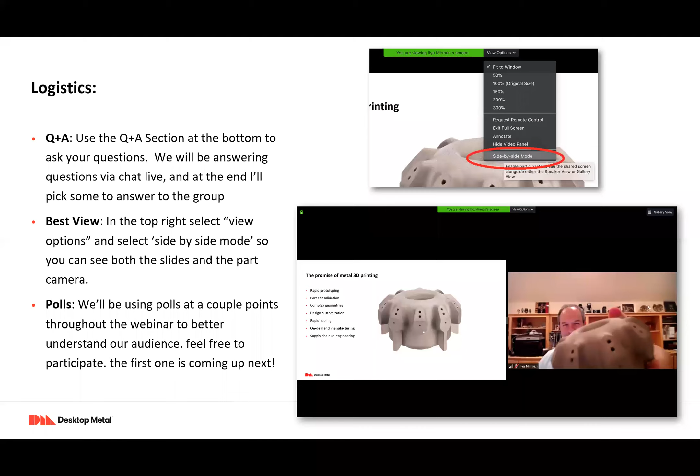3D printing addresses those challenges, and then talk a little bit about the technology choices we've made in our metal 3D printing systems. Then we'll do sort of a broad swath across dozens of application examples from the manufacturing floor, and then do a deep dive on a handful of case studies right from the manufacturing floor.

So let's get moving. So what are the manufacturing floor challenges? So first, if you think about as a product is being developed, as it moves from product development to manufacturing, there will be a need, of course, to set up a production line. And sometimes it could be assembly of components that are either off the shelf or custom that are being delivered. And other times it's the manufacturing, it's the fabrication, it's the stamping, tooling, molding.

So there is an effort involved in the time, the cost to set up a new production line. And it might be modest for some products. For other products, automobiles, for example, it's literally billions to stand up a new production line. And so one challenge is just the time it takes and the effort and the non-recurring engineering charge to create and move to manufacturing a new product.

Second, related challenge is the lead time and cost specifically of new tooling. It could be stamping, injection molding, extrusion dies. Third challenge is the maintenance, repair, and operation, sort of replacement parts for the manufacturing floor. Parts wear out, they need to be replaced. Next is a lot of those parts, or at least some of the tooling in particular, those are hard-to-machine materials. And so machining them in the shop is not an easy thing.

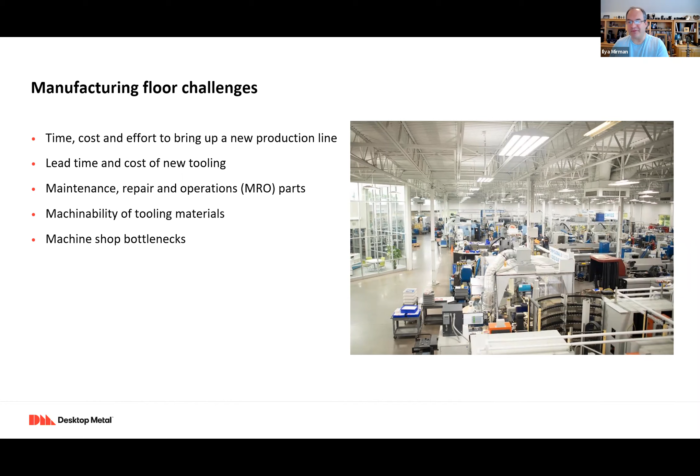So 3D printing for the manufacturing floor, and the reason I say for is because this is around the tooling, jigs, and fixtures, as opposed to what gets 3D printed on the manufacturing floor and used parts. That's the next slide. So with 3D printing you can have the notion of nearly real-time tooling. You need a part and you can have it in a short number of days, as opposed to the lead times of either ordering it and waiting for a custom tool to be made, EDM, or even just CNC, but that could be a complex operation.

The geometric complexity of the tools is free. We'll see these in more detail, but here are some examples. This is end-of-arm tooling, and you see it's lightweighted to reduce wear and tear on the robotic arm. There's relatively complex tooling available. So the geometric complexity is free. If you can imagine the 3D shape, you can probably print it. You can offload, of course, a lot of the work; you're now printing it instead of machining it, so machinist labor is not involved.

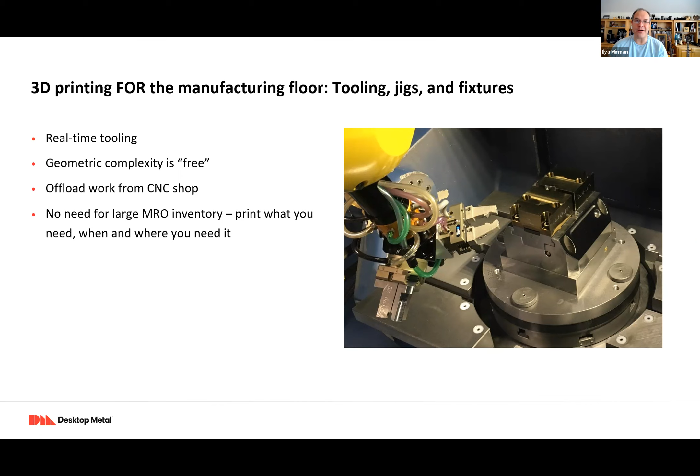And if you think about a manufacturing floor, you have replacement parts. You can't have a production line go down. And so you often have a stock room with maybe 3 or 5 replacement parts times 100 or times 1,000 different parts. So instead of keeping that inventory, you could just print what you need when and where you need it. So that's the promise of 3D printing, and that is how both plastic and metal 3D printing is being used.

So that's printing for the manufacturing floor. And then there's, of course, 3D printing on the manufacturing floor, and the value proposition is mass production without tooling costs, without tooling delays, without the constraints of tooling. And so you can now print a broad, infinite range of geometries and parts. We'll take a look at some of these, but you see you can do quite intricate parts, really on demand.

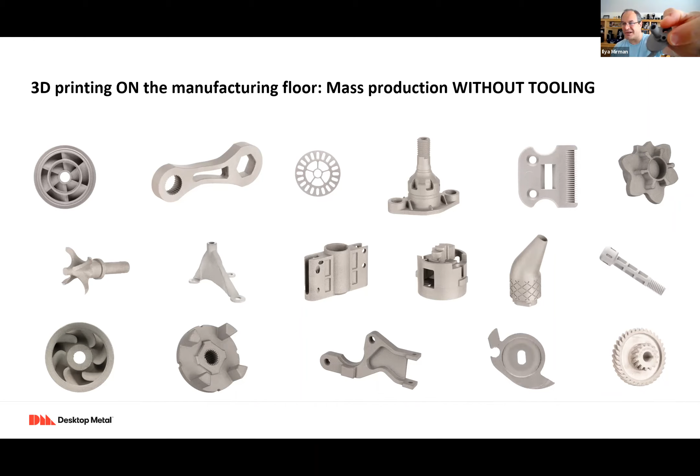Here's a part that might otherwise be cast, but there's effort and non-recurring engineering charges associated with casting them. With 3D printing, you can just manufacture them. So both of these, the tooling, jigs, fixtures, as well as mass production, are relevant for the manufacturing floor. And now technologies are available to actually deliver on this promise. So let's take a look.

And we have 4 main product lines. We have a composite fiber printer, and the innovation there is you can print continuous fiber reinforced composites. And then we have 3 metal systems: an office-friendly studio system, a shop system for mid-volume production, and a production system if you need to make tens of metric tons of parts per year. I will mostly focus today on the studio system examples for the manufacturing floor, although I will touch on how the mass production printers are relevant as well.

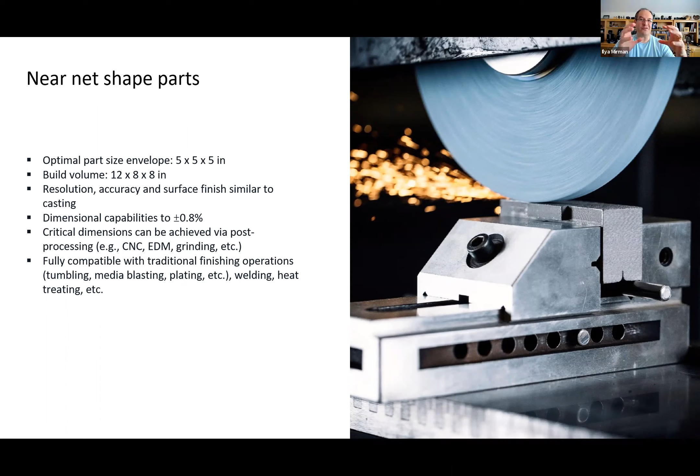The ideal part size, the sweet spot, is parts that fit in the palm of your hand. And so that might be a 5-inch cube or softball-like sizes. The build volume is more like a loaf of bread, 12 by 8 by 8, so you can print a bunch of parts. We can make larger parts, but that's kind of the sweet spot. And of course, afterwards, you can do everything you do to metal parts, whether it's welding, heat treatment, etc.

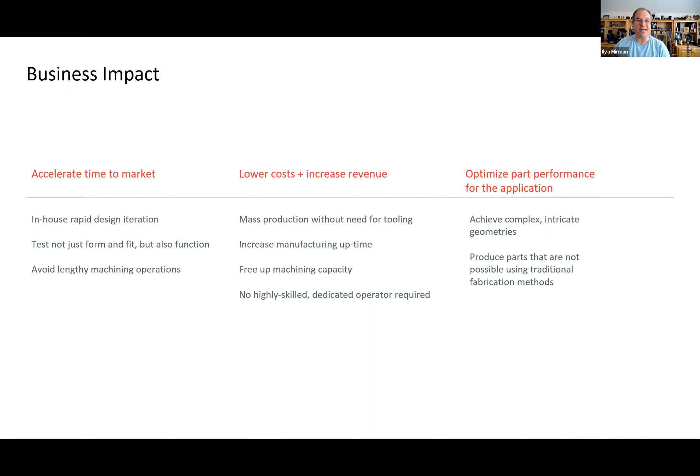The big business impact, the big benefit, there's 3. There is optimizing the part performance, so you can make better parts. With 3D printing, you can consolidate assemblies. By creating shapes that you can't with other manufacturing processes, you have a whole new design freedom, and that can result in better parts. So that's one benefit. The other is rapid prototyping. You get parts to market faster. What I'll focus on today, though, is what is the win for manufacturing?

In manufacturing, there's 2 giant opportunities. One is you can finally do mass production without the need for tooling. So that means you don't need to make molds, you don't need to make stamping dies. You can create a range of parts. You can have both mass production and mass customization. Imagine every part in a build. You're printing 16 liters or 50 liters worth of metal parts every few hours, and every part is a little bit different or a lot different. You start with a digital file, so as easily as you can change the digital file, you can print what you need. So the first win is mass production of parts without tooling.

The second is being able to print all of the things you need on the manufacturing floor. So that's jigs, fixtures, things that hold, as well as things that deform parts: metal extrusion dies, sheet metal stamping, and mold inserts. We'll see examples of all of that. So let's talk a little bit about rapid tooling for the manufacturing floor. I'll show a few examples, but you can do things like a drill alignment jig. There's a variety of end effectors we'll take a look at. Just a bunch of parts.

These are from diverse areas. The smartphone fixture is obviously from a consumer electronics product. There it needs to be metal because maybe rework is happening. It's a high temperature operation. With drill alignment, there might be forces involved. You'll see examples with the robotic end effectors, a lot of forces involved. What they all share, though, is they're relatively complex parts that are not trivial to machine, and you need just a few of them. For that reason, you're not going to set up a whole mass production line to produce these manufacturing aids.

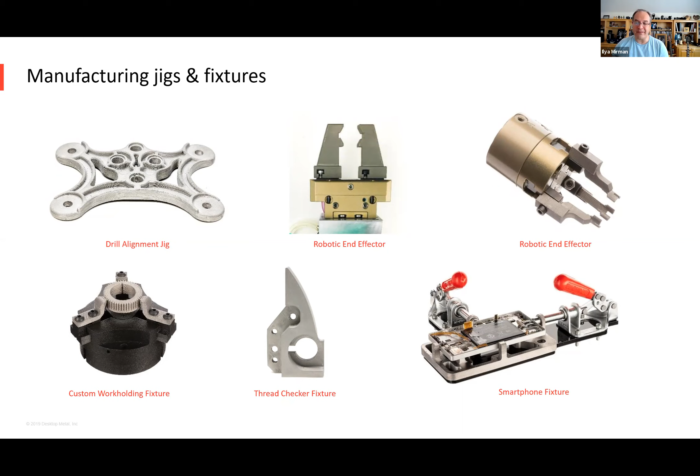And so 3D printing is a great way, because the alternative is machining, and machining can be expensive. You might have capacity bottlenecks. It involves quite a lot of labor. So the next stage, tooling. The whole point of tooling is these are hard metals, and so machining hard tooling is actually quite tricky. You can go through a lot of carbide tools. So it's a big win, for example.

So you see this first example of a mold insert with a conformal cooling channel. So this is the part that's actually getting molded. We printed this part just halfway, so you see there's an internal cooling channel. The big win there is you can dramatically decrease the cycle time. The cooling time decreases, and so you can dramatically increase the frequency with which you're molding these parts.

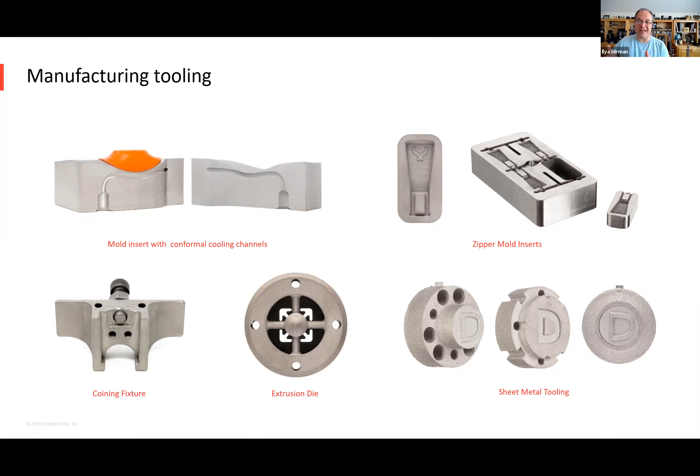And so tooling, being able to print tooling on demand, in fact, you can be printing tooling while the product is being developed. It's really parallel with the product being developed. You don't need a lot of lead time. And so by the time the product's ready to be manufactured, you got your tooling ready. And you can turn to a growing library of metal materials.

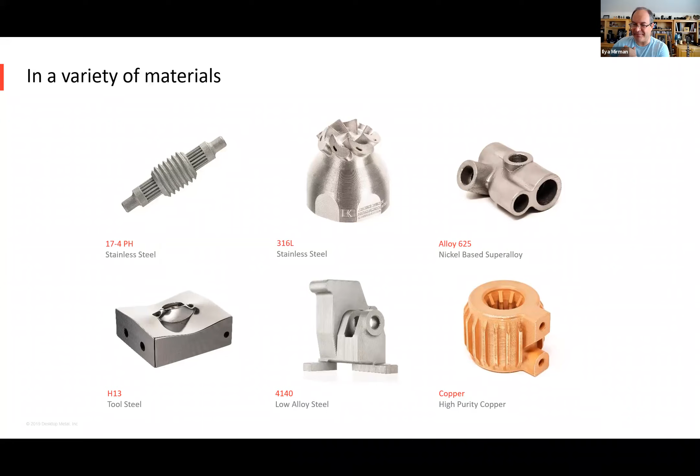All right, manufacturing tooling, jigs, and fixtures. So another whole category is things that hold. So let's take a look. Let's do a rapid walk around the world. So this is a part that places an O-ring around another part during the manufacturing process. This is the end of the robotic arm, and so it stretches, puts the O-ring on, and compresses.

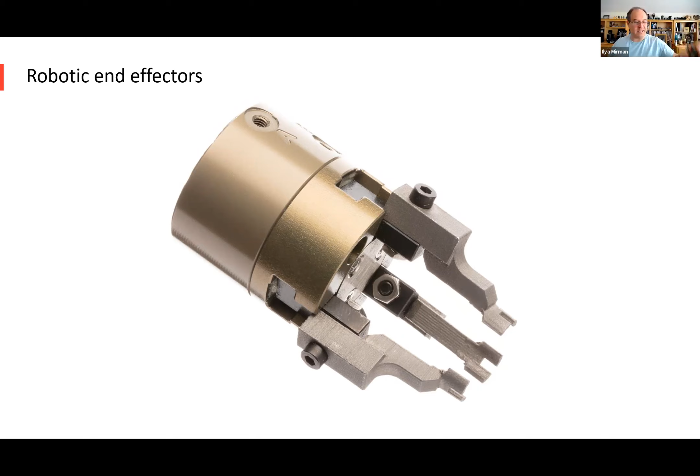And so, I think you can see, these are relatively fine end effectors. And so being able to machine them, you can imagine you have a ball end mill or whatever cutting tool. These are probably a millimeter, less than a millimeter in thickness. These would deform during machining. And so it's a pretty extensive machining process, pretty laborious, pretty small stuff, and it's quite tricky. Now you can 3D print a whole bunch of them at a time, and have them ready when you need them.

Let's see. Here's another example: end of arm tooling. So we'll see more when we get to this particular case. End of arm tooling, of course, refers not to the fact that it's being held at the end of his arm, but it's the end of the robotic arm. And so this is an example of end of arm tooling. It picks up a heavy, hot metal part being forged, I believe.

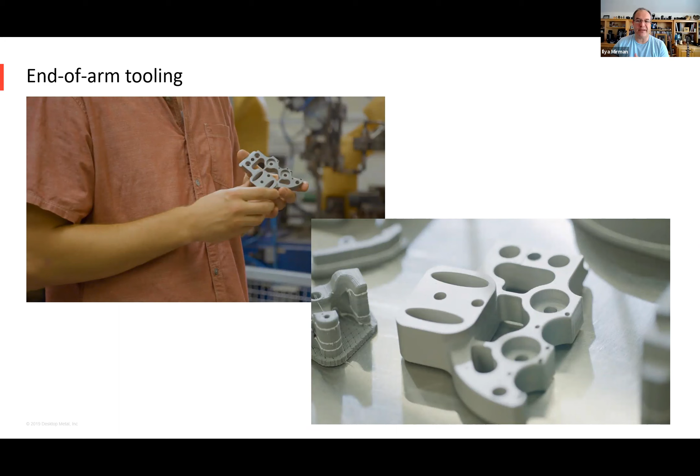And the big win with end of arm tooling is lightweighting it. The less it weighs, the faster the robotic arm can move around, the less inertial loads there are. So you can have a faster and more reliable process; there's less wear and tear on the robots. You can do, of course, complex shapes. This is a drill alignment jig. We talked a little bit about the smartphone fixture.

Let's spend a second on mold and tooling. So one of the materials available is H13 tool steel. So this is great for both hot and cold work applications. In another second, I'll show you it actually in action in at least one place. But you see, here's the familiar stress strain curve. Well behaved. There's the as-sintered. As-sintered, the parts come out from the furnace fully annealed with no memory of the shaping process.

And in fact, if you cut and section them, you literally cannot tell X, Y, and Z axes. The grains, the crystal structure looks identical. You get 96 to 99% dense parts, and the voids are typically 5-micron voids, evenly distributed. So it's well behaved, not unlike a very fine casting. So tool steels, and you can of course heat treat.

You can heat treat all of the materials. Even the 17-4 PH steel becomes much harder. 17-4 PH steel comes out from the furnace annealed at 25 to 30 Rockwell C, and through the heat treatment you can get it to 45, and through plasma nitriding, a case hardening process, you can get it to 65. So a broad array of heat treatment processes are available.

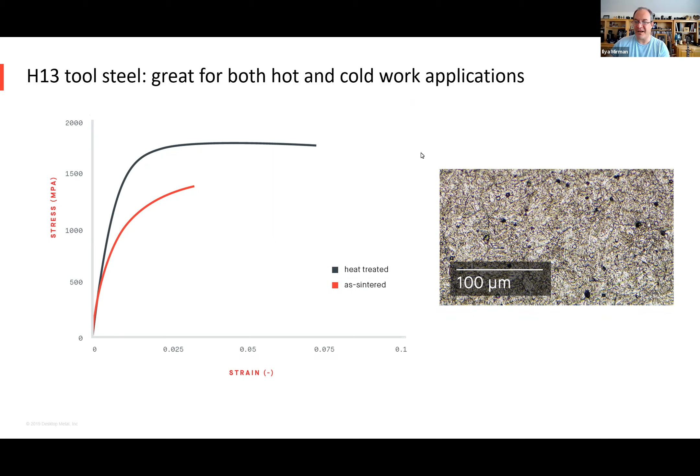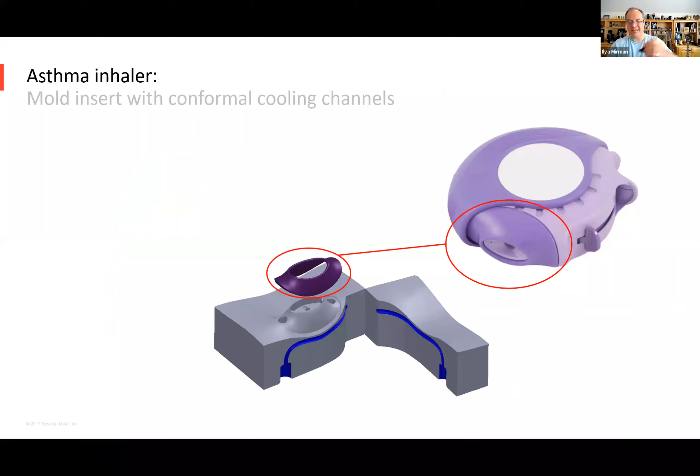All right. So let's take a look at some examples. So there's the asthma inhaler for the mold. Here's the actual part getting molded. It's an insert. You can make cooling channels. And so the big win here is twofold. First, you print a part that's near net shape.

You may still need a couple passes to get the exact surface finish and dimensions you need, but by getting the tool steel to near the net shape you need, you don't need to start with a large block of steel and go through a lot of wear and tear on your carbide tools to machine them.

The second one, of course, is the ability to create a geometry that you can't produce any other way, which is an internal cooling channel. And so here's an example of that. Basically, the closer you can get the cooling channel to the part, the faster you can cool the part down and decrease the cycle time. And typically that can increase things 25, 40%, which is a big deal for relatively low margin kind of operations.

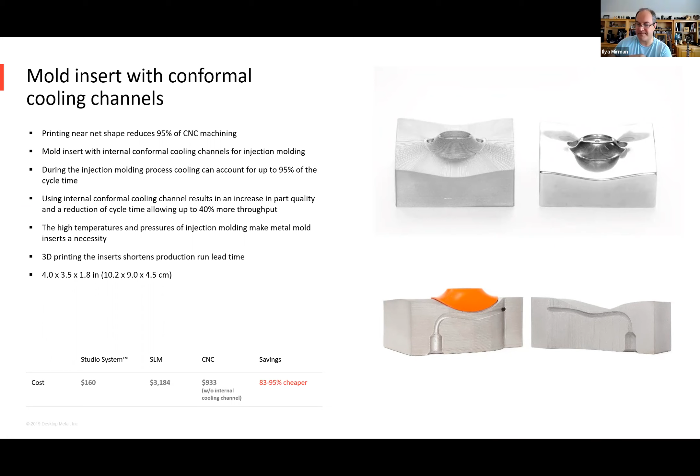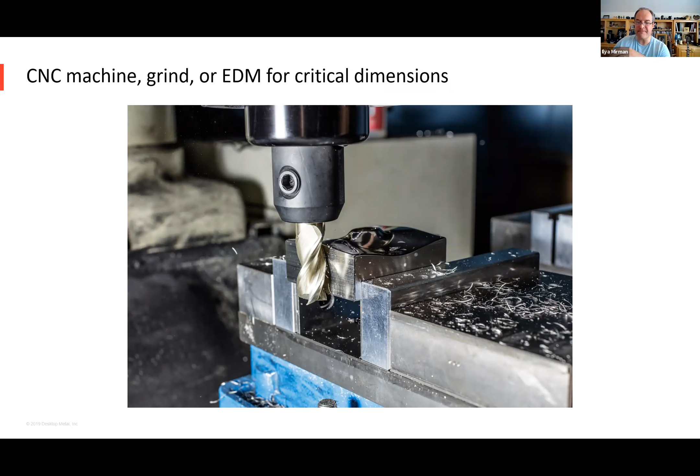And then, of course, here's that mold insert getting, for the critical dimensions, you can machine them. So here it's getting machined to fit perfectly in the mold cavity, and then here's another mold insert getting EDM finished.

And do zipper molds. I think I have an example of that. Where is it? Here it is. See, there's so many metal parts around. So here the idea is, first of all, a little background. What is this? So it turns out, news to me, but zippers are a fashion element.

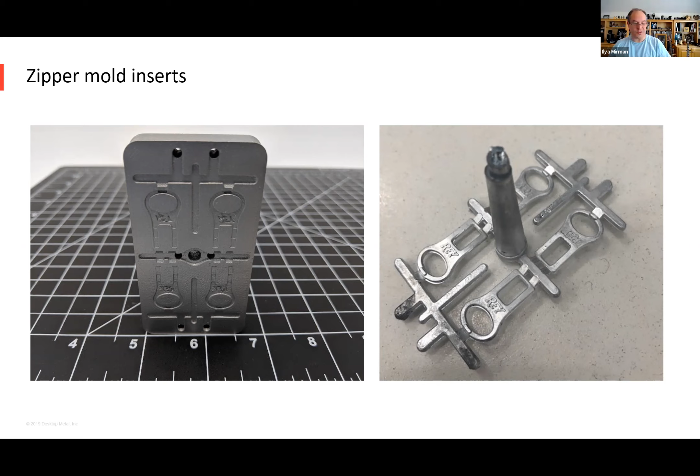And so now imagine you need to produce maybe a run of custom zippers, you just need 500 of a particular zipper for a luxury bag or something, or a piece of clothing. Instead of printing or machining whole molds, you can have just inserts. And so print an insert, and you can do that with the fine resolution printhead from the Studio System and use it right in the mold. And so now you can do relatively small, precise features that might not even need post-processing of the mold insert.

Do extrusion dies. Here's an example. So this is a twin screw extruder that's mixing and pushing a dense ceramic slurry through this extruder. I'm going to take this off. So here's the interface, and here is the part in question. You see there's a gasket on this end. So you basically start with a circular profile, and you end with a rectangle.

And it's rectangle because the final part, it's like you're extruding pasta, except you're extruding ceramic mixture. The goal here is to create a rectangular shape. You need to start from circle because that's the standard interface to the extruder. It's an easy part to model. This is a loft. If you have a parametric feature-based solid modeler, you start from the circle, you draw the profile, you wind up with a rectangle. But it is not an easy part to actually reduce to practice, to create.

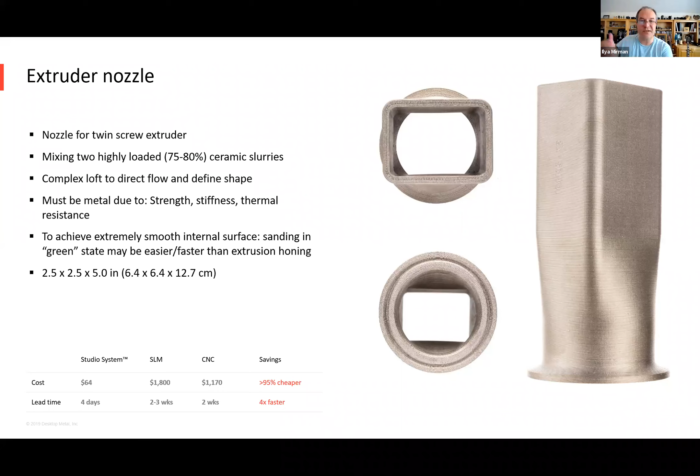You need a 5-axis machine, and our customer looked at a number of bids, and it would be $2,000-$3,000 to make this shape. You could see this is probably 6 inches or so, maybe 7. So with the Studio System, it's an order of magnitude less. It's $60 or $80, and you have the part. You can make complex extrusion dies that are either difficult or impossible to create. So this one you might EDM this shape.

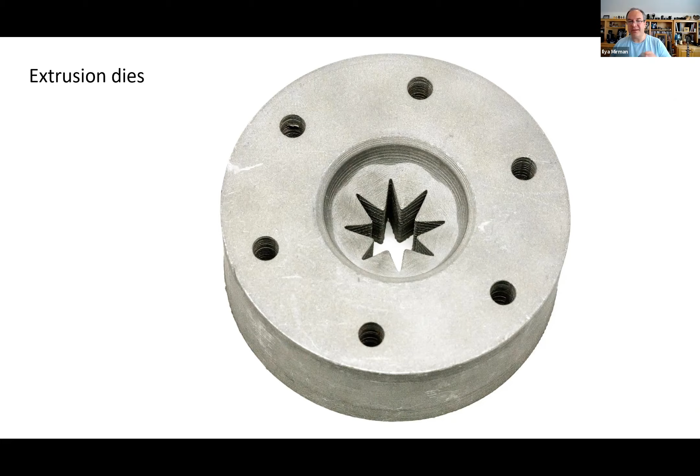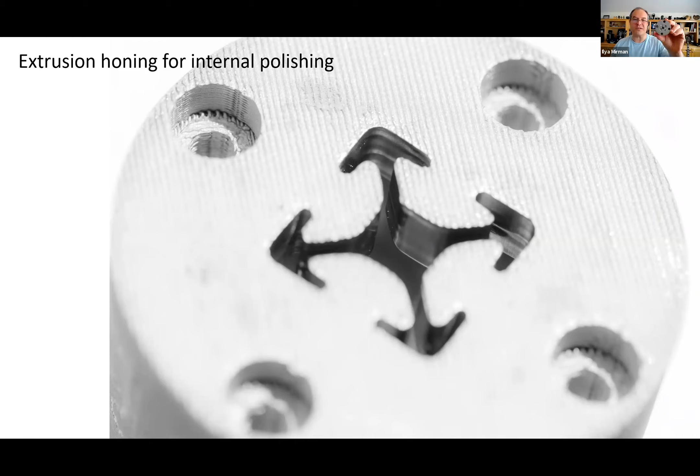Here's an extrusion die with a familiar 80-20 profile. In this photo, you might see that this surface is particularly reflective. You can do, of course, extrusion honing so that whether it's aluminum or zinc that flows through here or plastic, it flows easier. So the same things you might do to dies, you can do to these dies.

Sheet metal tooling. Of course, 3D printing is not a win in every single application. So you got to look at what is a sufficiently complex part, what is hard to machine, or where do I not have the lead time to wait. And so for some parts, even sheet metal tooling makes sense to print.

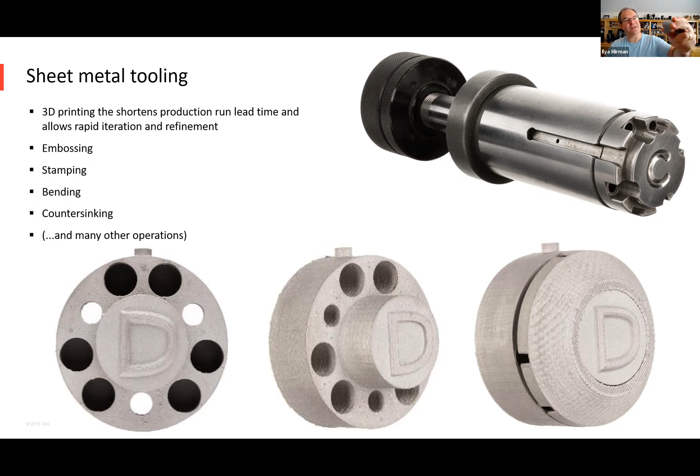So you can do embossing tools. We've seen stamping, bending, countersinking tools. Here's a couple of these parts. So this is part of, I believe this is embossing, for logos on a piece of flat sheet metal forming.

You basically go from art to part. Here it is in SolidWorks, and there it is, those very parts printed a couple days later. So sheet metal tooling, bending, I have examples somewhere here, but you get it.

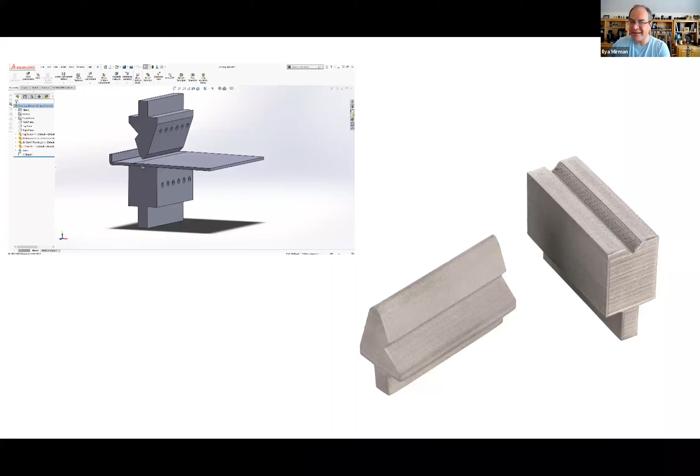Here's a fun little example, a blacksmith touch mark. So H13 tool steel. Here are the inserts printed with a custom stamp of this blacksmith. And you know what? I'm going to turn down the audio. Whoops, that's not it. I'm going to play this. So you're going to see, this is a couple thousand degrees Fahrenheit part getting this stamp from the blacksmith using this H13 printed insert.

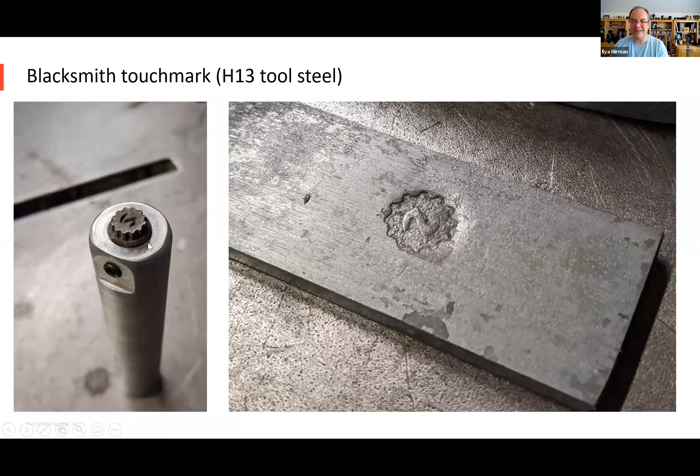So let's see what that looks like. Really, we're showing you the video so you get a sense for, okay, these parts are pretty tough, pretty hard. You can do hot work with them as well as cold work. So now let's take a look at the actual stamp. And there's his little, I don't know if that's an S or a Z. And here is, again, the touch mark. Here's the resulting stamp. Works great.

All right. So now let's take a look at some case studies. So the first example is Alpha Precision Group. Alpha Precision Group is in St. Mary's, Pennsylvania. It's a leading vendor of precision metal components using, for the most part, powdered metal and the metal injection molding approach. They wanted to do two things. One is reduce the tooling costs for their mass production lines, and the second is being able to engage their customers earlier during the design process, and so being able to produce parts in low volume as samples to actually win business.

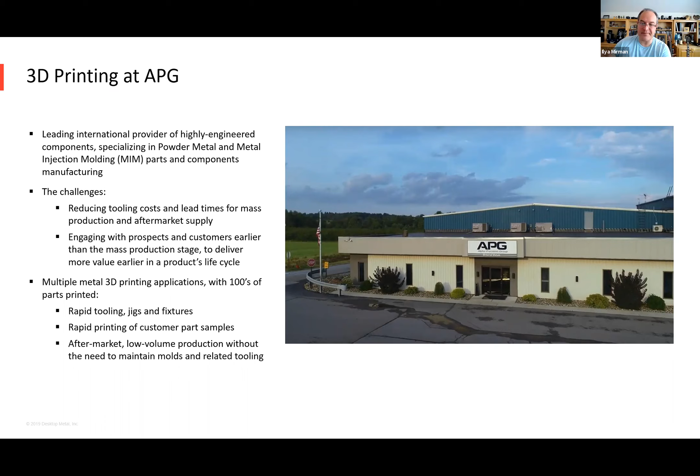So there's a number of examples. They've literally printed hundreds of parts with their Studio System, hundreds of tooling, jigs and fixtures kind of applications. I'll show you just a couple. This is that light-weighted end-of-arm tooling example. It's got to be metal because it's holding a heavy metal hot part, and it manipulates it, and you see there's light weighting going on. This would not be trivial to machine. This is a lot of different setups. Some of the radii are relatively small, so you'd need probably a small ball end mill to hog out a lot of this material. With 3D printing, that geometry is free.

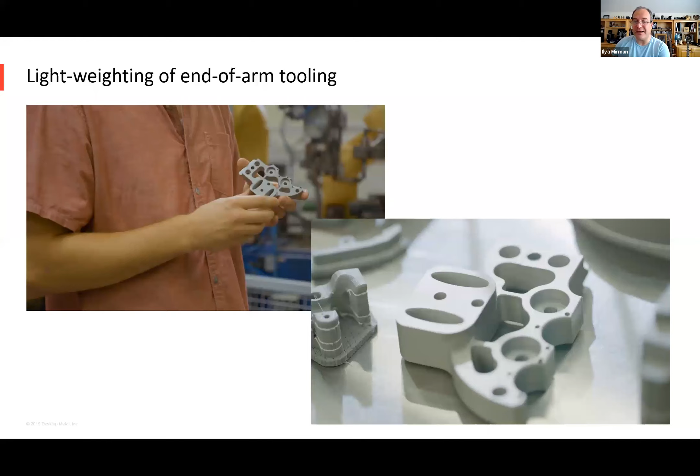Another great example, let's see if I have that. I do. The chuck jaws to hold work pieces together. So this is holding parts during a machining operation. It's a large part. These jaws come together and grab the part. I'm going to hold it up. You see, this is not a trivial part to machine. You could machine it, but this would be a lot of different setups, and it would easily keep a machinist busy all day. Now you can just 3D print this part and throw it on the manufacturing floor.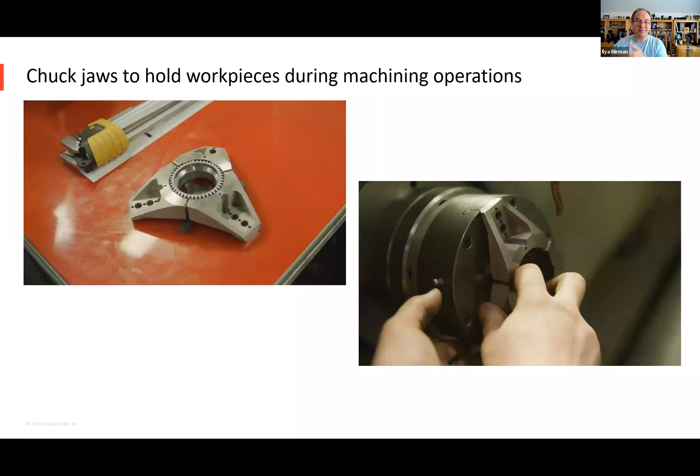Another example, I love this one, and I'll tell you in a minute why. So this is an assembly line screwdriver. This originally was a manual operation where somebody would screw in components on the production line. It's obviously a repetitive task, and you can imagine repetitive use injury, probably also not super fun to just do that all day. And so the manufacturing engineers came up with a pneumatic tool to replace that screwdriver. Instead of a human, now there's this nice ratchet set that works great. It's a pretty complex design. I'm going to try to take this out without having the 20 parts fall apart. So you see, this is a ratchet set, and this is the unit that is at the heart of this device.

Why do I love this example? This is an example of a small company walking around the manufacturing floor, seeing an opportunity and designing something for 3D printing that they would never have somebody machine. Because if somebody was to machine this, it would be a $10,000 job, if at all possible, that they would send outside and probably get back in something like 2 months. Instead, they conceived the idea and within a week had this part. And so this is a dramatic lead time savings, days instead of a couple months, and dramatic cost savings. It's $700 instead of over 10,000.

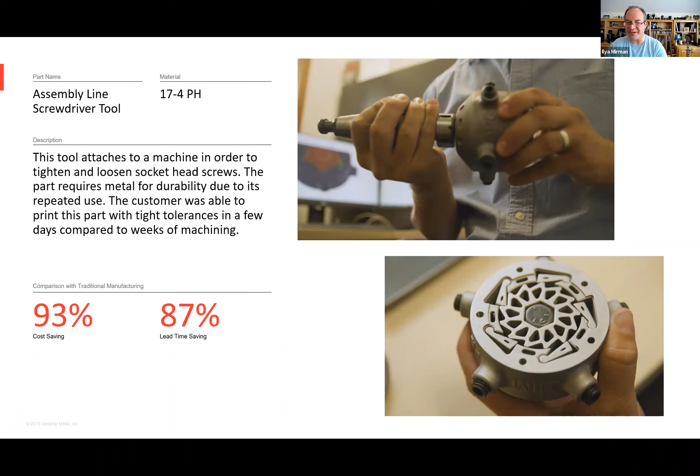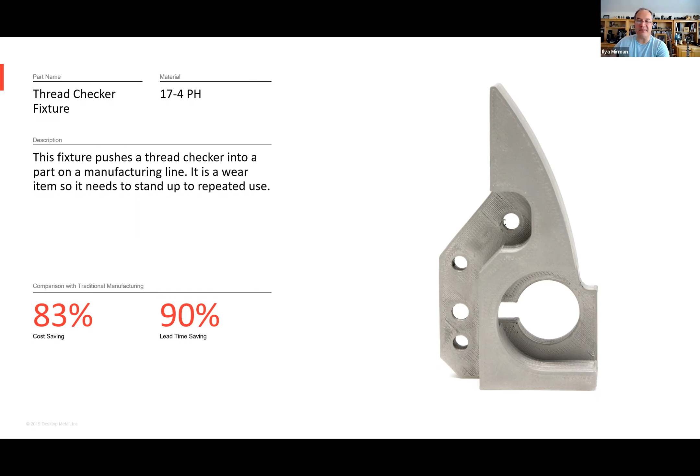There's more examples from their manufacturing floor. We only have limited time here, so I'm not going to show you. There are hundreds of parts, but there's a coining fixture. There's a thread checker. This pushes a part into essentially a way to check whether the thread on a molded part turned out fine. This part wears, and so the ability to print it and easily replace it on demand is an important one. And the big win for Alpha Precision Group is a dramatically compressed time and cost of manufacturing tooling. And they're not just doing things cheaper and faster, they're doing things they wouldn't have otherwise.

And so that is a very, very cool thing for a small manufacturer. The other big win is the elimination of all the labor-intensive manufacturing steps by designing new tooling. And finally, they can produce on-demand parts both during the early stage of their sales cycle as well as aftermarket, so that they don't need to maintain a tool.

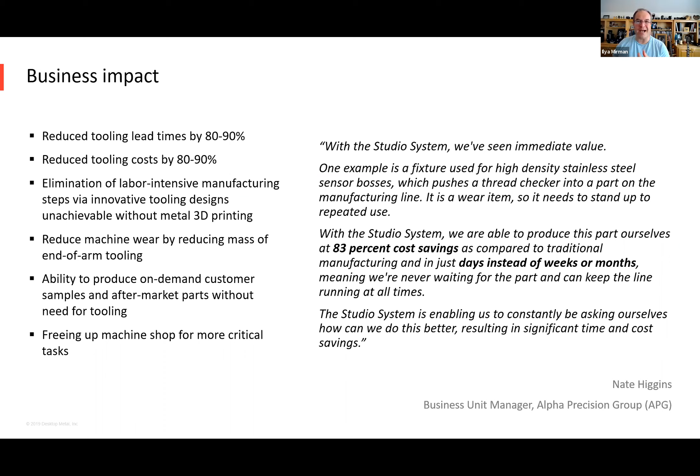Imagine you do a production run of 5,000 parts, then you keep the tooling around because 3 years or 5 years from now, by contract, you're obligated to if there's a requirement for some replacement parts. You might run a tool a day or two to produce 20 or 50 or 100 parts years after your mass production run. But in order to do that, you keep tools around. Instead, you can just print the actual parts on demand. And so that's the other use that APG is doing.

Another example from the manufacturing floor is Egar Tool and Die. It's a 40-year-old company in Ontario, Canada. So they have quite a broad scope for additive manufacturing. They make largely automotive stamping. Their manufacturing line is automotive stamping for automotive parts and welding of some of those parts.

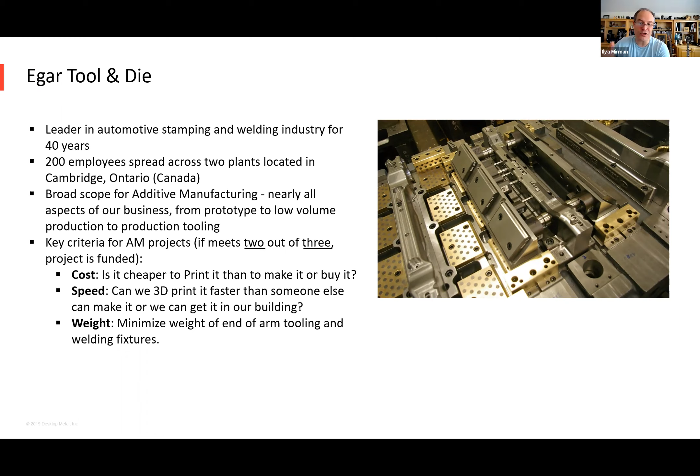The things they 3D print are anything for the manufacturing floor if it meets 2 of 3 requirements. So either the part is cheaper and or it's faster to 3D print, and in particular for the end of arm tooling, they can reduce the weight. So if they can reduce 2 of these 3, they apply 3D printing, and they've seen a lot of benefit to that. I'll show you just a couple examples, because we don't have time for any one of these beyond just a few minutes.

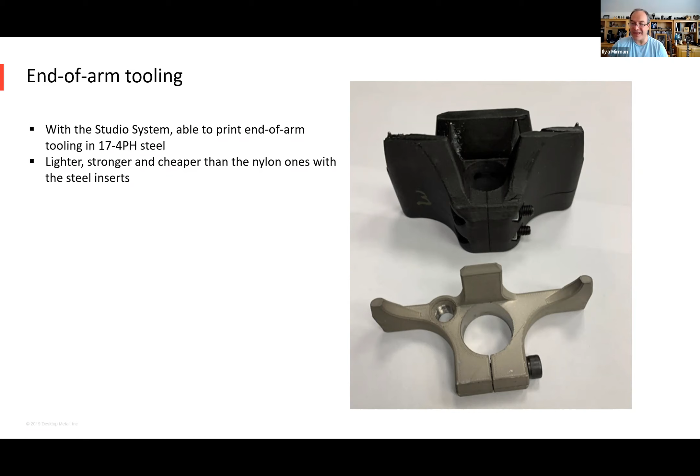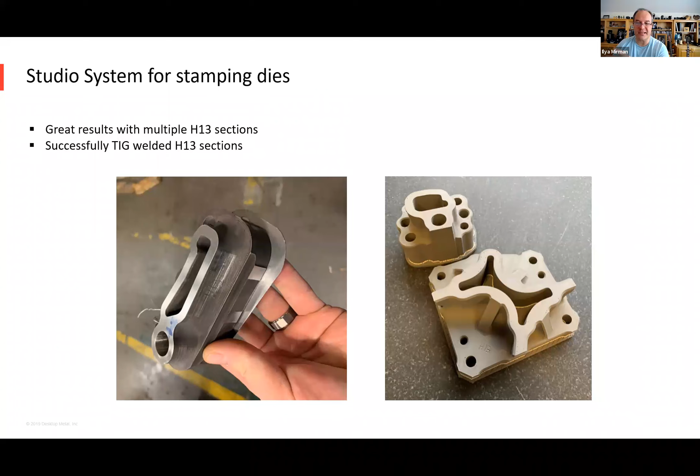So end of arm tooling started out on the manufacturing line with nylon printed parts with steel inserts, and by redesigning them, they're actually single pieces made of steel. They're lighter, stronger, and cheaper. And so that's a win. They've used Studio System for stamping dies with H13 tool steel, and in fact, welding some of the materials together. The parts weld beautifully.

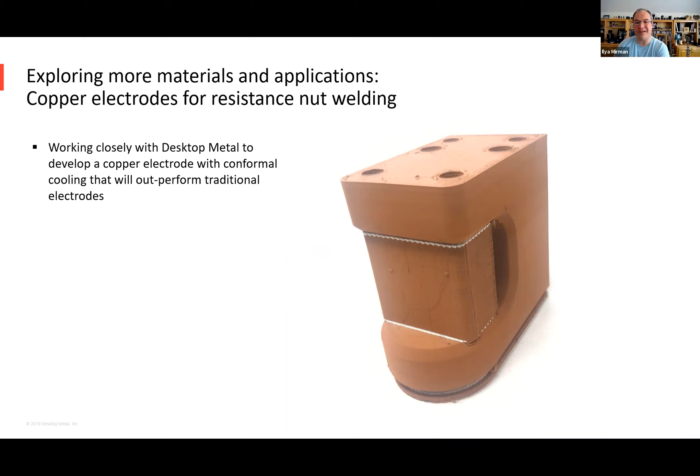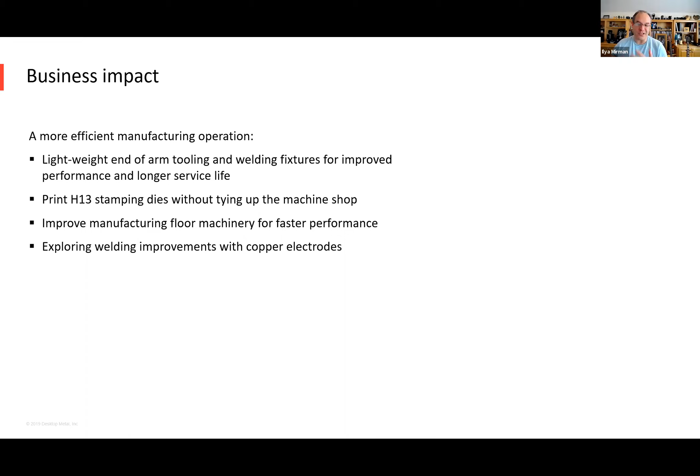And they're also starting to do some experimentation, as we bring other products like copper to the market, printing copper electrodes for welding with internal cooling channels. That's a cool example. So business impact is you can lightweight end-of-arm tooling, you can print tooling components for stamping dies, and start to experiment with new materials.

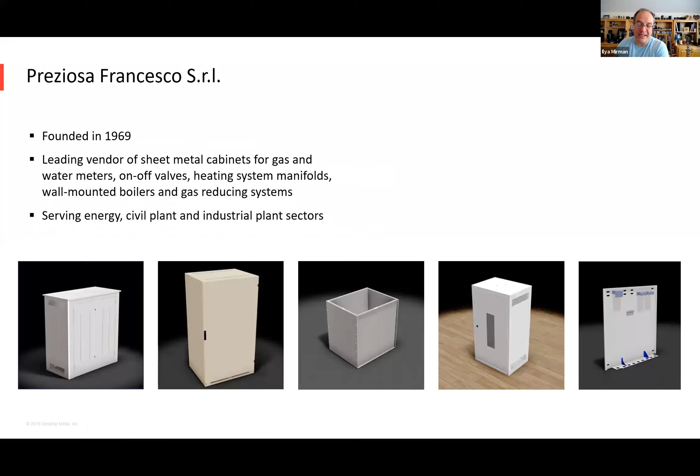Next example I'll show is a sheet metal fabricator in Italy. This is founded in 1969, so the company is as old as I am. They've been around in a variety of markets, both residential and industrial, and they make a variety of sheet metal cabinets. So the challenge there is replacement parts for the manufacturing floor.

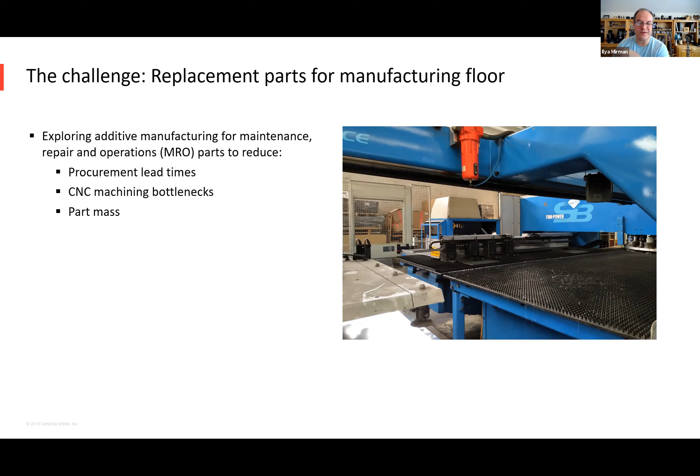For these MRO, maintenance, repair, and operation parts, there's obviously a lead time when you're ordering a part that you don't have. The part may need to be machined wherever you're ordering it from, and then for the parts that move fast, whether it's end-of-arm tooling or other applications, you want to reduce part mass.

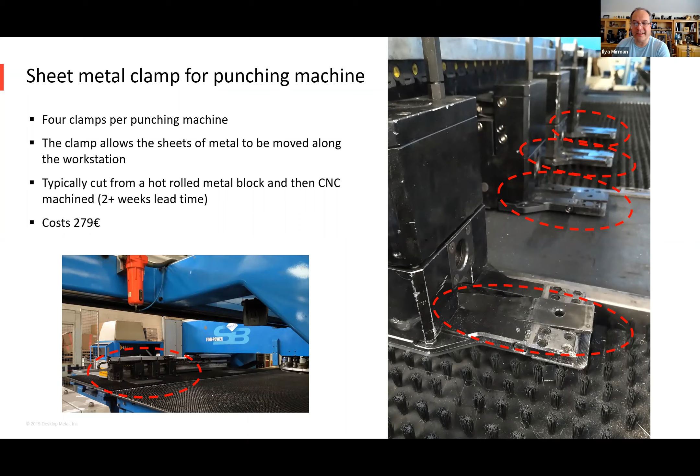So they printed a replacement part with a Studio System. Here's the printed part, and here's the original. First of all, the printed part is lighter by virtue of having the flexibility to print a honeycomb infill pattern inside the part. Most of the load is on the outside, so you don't need all of the material to be present inside.

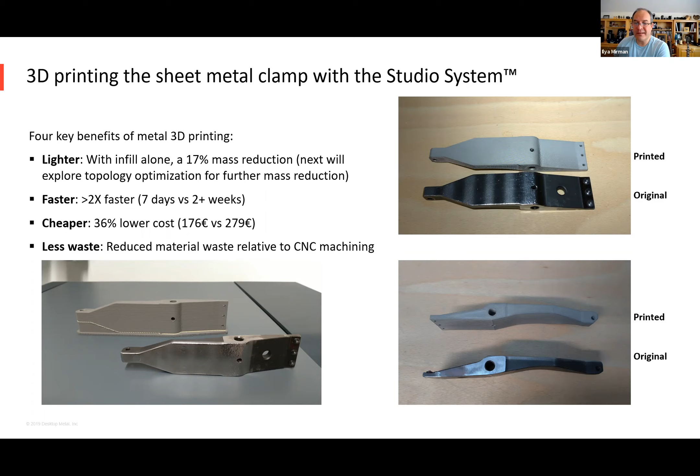And so you can control just how much of a honeycomb there is, the density of that infill. And so there's a 17% mass reduction. This is, of course, faster. It takes a week versus 2 or more weeks. It's a cheaper part, a lower cost part to produce. You don't have the waste of CNC machining.

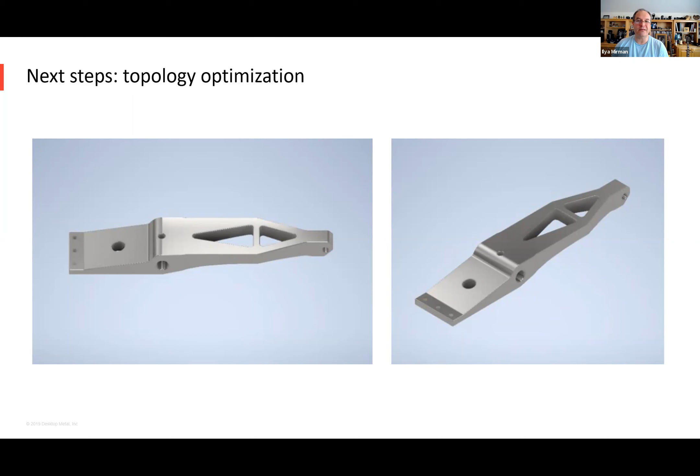And the next step that they're taking is they're going to explore topology optimization. So this is the first cut at it. They'll test it, evaluate it, do some simulation, then print it. And so then the idea is the part can be even faster to print. It could be a lighter part and actually stronger.

Another example, and the reason I like this example is you would never buy a metal 3D printing system so that you could print relatively simple and small parts on your manufacturing floor. This is not a super complex part to machine. It would probably take, I don't know if it's 1 hour or a couple hours. It's not a giant job, but this is the beauty. If you have the metal 3D printer, just design it in CAD, throw it in, and then you'll have the parts.

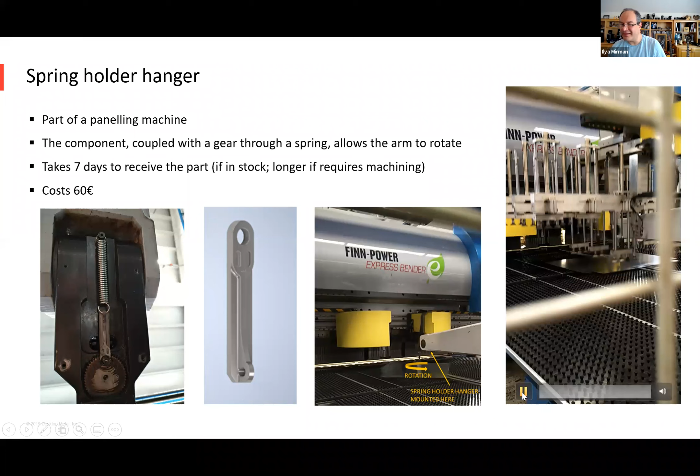So this is a spring holder. This connects a spring to another part that moves around. I'm gonna see if I can play the video. Hopefully it's not too loud. So you see this is right in here. The action is right in the part that rotates the part around. The sheet metal is going to rotate in a minute.

It's mesmerizing, isn't it? All right, I think you get the idea. So this is a part that's part of this assembly. Let's see, there it is, rotated. So, all right.

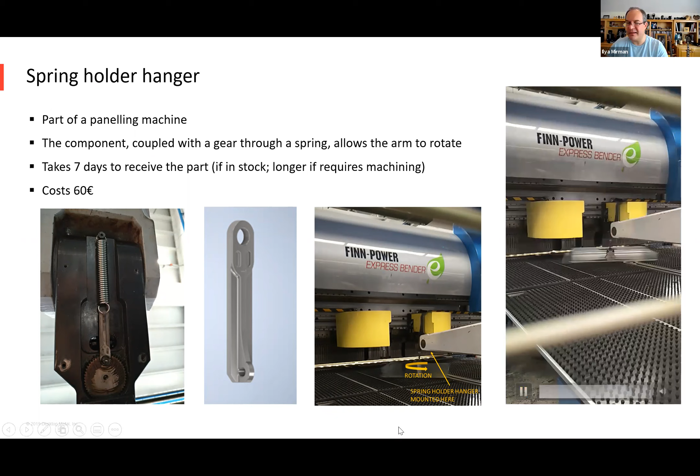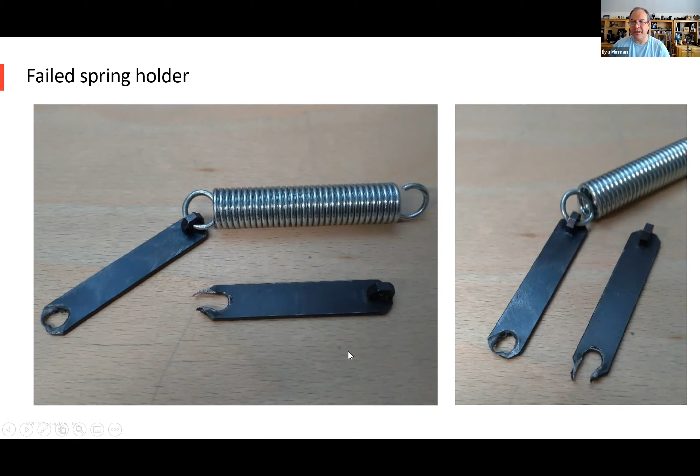So why print it? Well, the part wore out, the part broke. So here's the original part. Here's the design part that was reverse engineered, but also improved the strength of it. Here's the part in Fabricate. You see it's a very light part. It's about 8 centimeters, so that's just about this long. Here are the printed parts. And this is a part that is going to see a few thousand cycles of loading every day. So this is a great fatigue application.

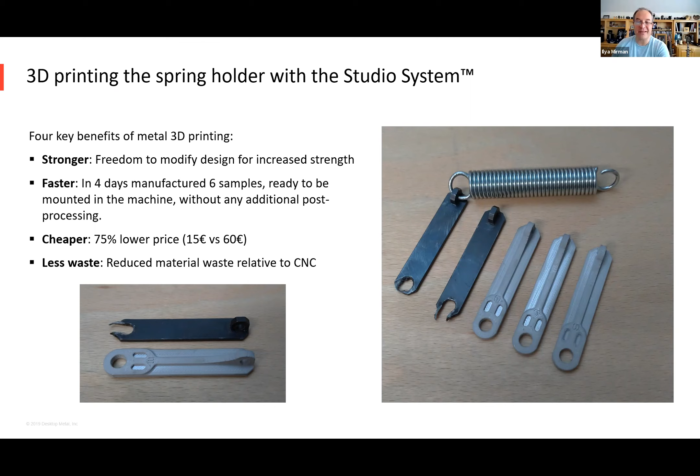So the impact is the ability to print replacement parts relatively quickly for the manufacturing floor, no CNC machining, lower lead times, lower costs, and make better manufacturing tooling, manufacturing parts. These parts are not only weigh less, but they're stronger. And of course, you can do this kind of optimization because you have the design freedom that you might not have with other manufacturing or fabrication processes for these manufacturing tools.

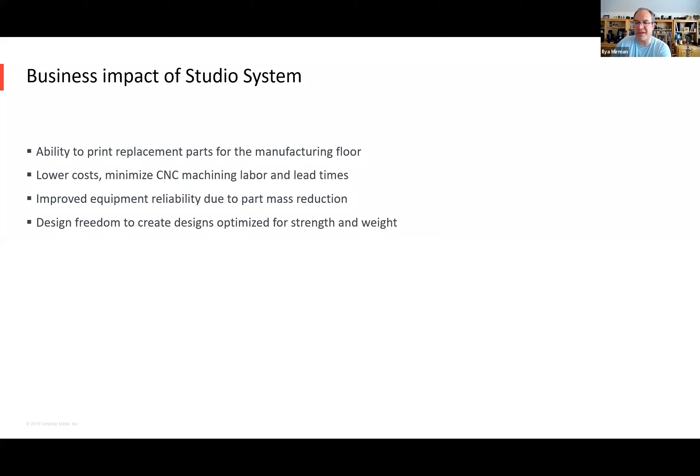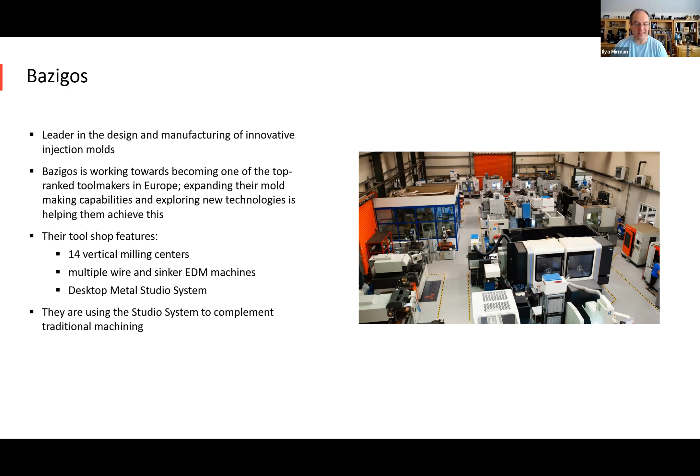Another great example, so this is from Greece. Bazigos is the largest mold maker in Greece. And it's working towards really becoming a leading tool maker in all of Europe. There's a lot of complex advanced equipment, and they've recently brought in a Desktop Metal Studio for the application being mold inserts. So I'm going to show you one example of these mold inserts.

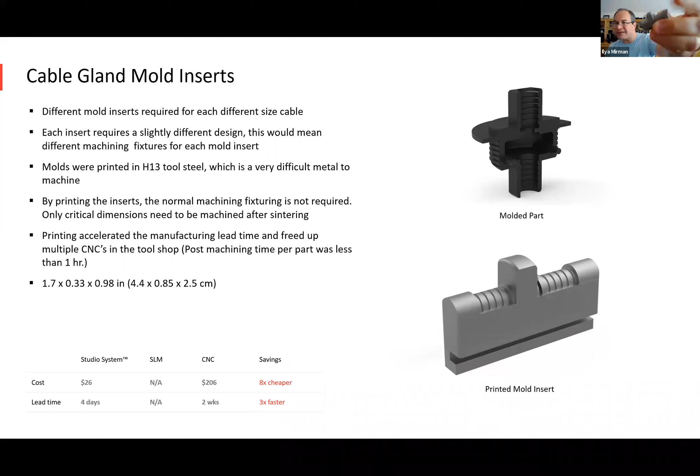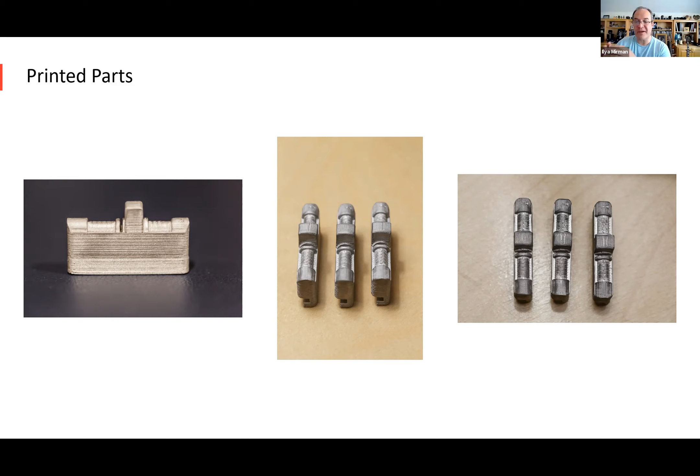So basically the part that's getting molded is this cable gland, made out of plastic. Here is the profile that's used for it. I don't know if you can see this, but this is a relatively precise, relatively small part. Here it is, maybe in a close-up. And the whole point is, with a Studio system, you print this in H13 using the fine resolution print head and start using the part with just a little bit of post-processing for the critical dimensions. So you have basically a new level of flexibility in creating mold inserts. You don't need to machine the tool steels from a large block of steel.

Next example is Ultra Machining Corporation in Monticello, Minnesota. I was there a few months ago. It's a great place. It's a family-owned business. The interesting thing about their manufacturing floor is there's more machines than people. This is a company that has invested a tremendous amount of capital and effort in robotics.

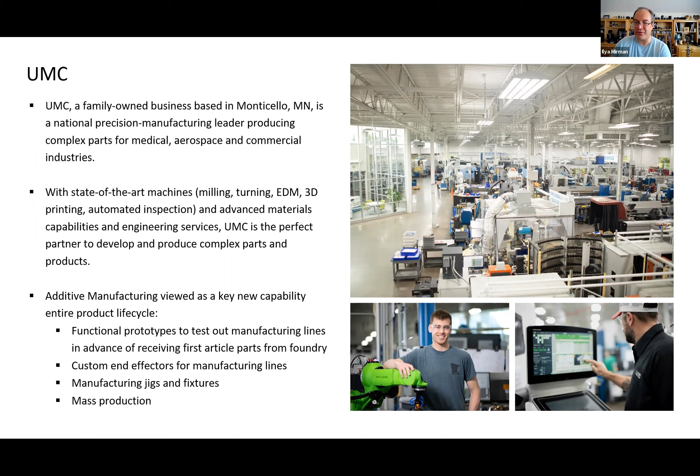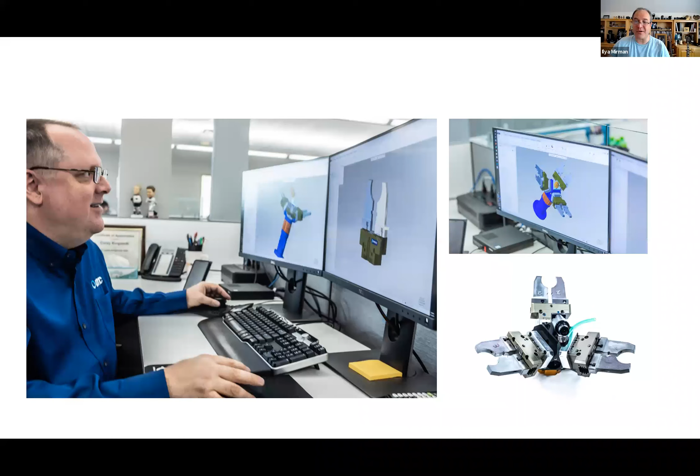And so what you have is these cells where you have 3 or 4 operations and really a robotic arm moving a component from one step to the next. And so it's great to use all this automation, but it means every time you have a new part that you need to pick up, the profile of the end effector that picks up that part needs to change. So that means for every new part, you might need to make several of a new type of end effector.

So here you have the design. And these end effectors, it turns out, even though the parts aren't very big, they're just a few inches long, because of the precision required, they easily take just one pair over a day of machining time. So instead, they're now 3D printing the near net shape of the end effector, and just a couple of the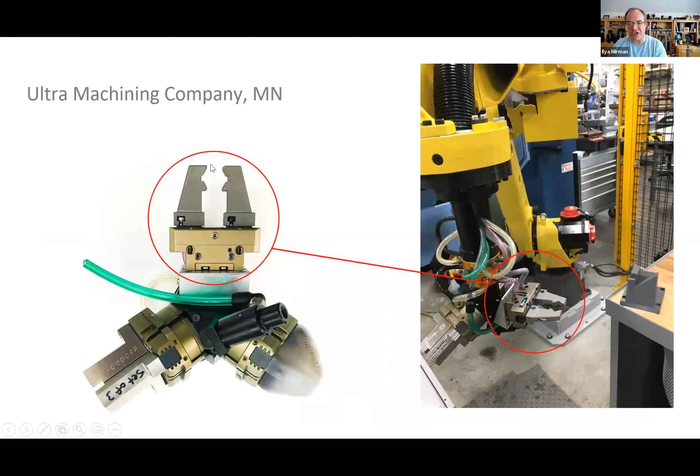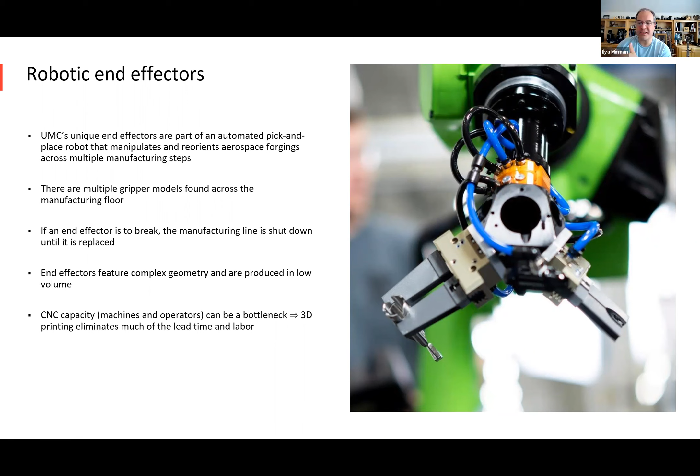key dimensions are machined. And so what you have is, for these multiple grippers that you sometimes need to A, replace, and B, add to the line as you add new components, they're featuring new complex geometry. The CNC is a bottleneck, and so 3D printing eliminates that bottleneck. So in this particular example, instead of needing over 12 hours to machine a pair, you just need an hour and a half of some post-processing.

And by the way, that hour and a half can be on a simple Bridgeport instead of a CNC machine you got to program. And so it's probably a different operator, definitely a different machine, and a lot less time. You can remove over 90% of the effort required.

The last thing I'd point out is the printer, you can print multiple parts, and the debinder and furnace are designed for batch processing. So you print for a whole week and print a full 30, 40, 50 of these parts. And then in one debind and one sinter run, you can sinter all of these parts and get them.

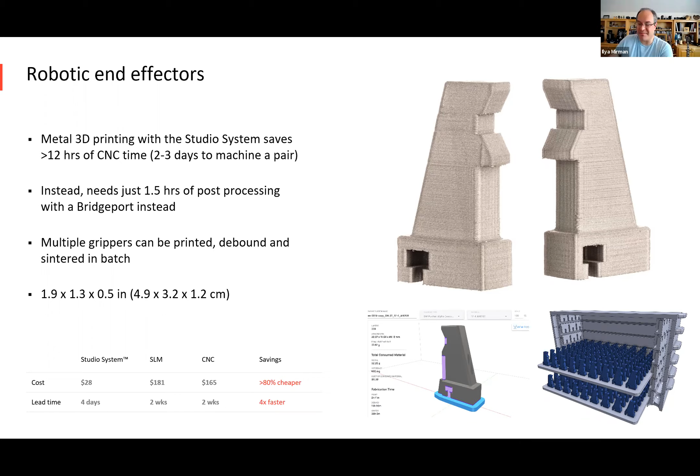All right. So that's a bunch of examples from the manufacturing floor. Now let's talk just a little bit about mass production, because it is also on the manufacturing floor. So binder jetting for mass production. We have developed processes to use the same MIM-like powders for both the Studio systems, bound metal deposition, BMD process, and binder jetting. Binder jetting, of course, is a process similar to how you're printing with your inkjet printer.

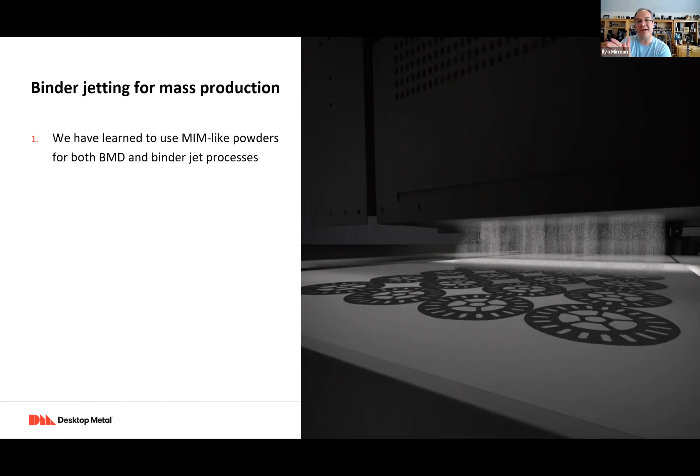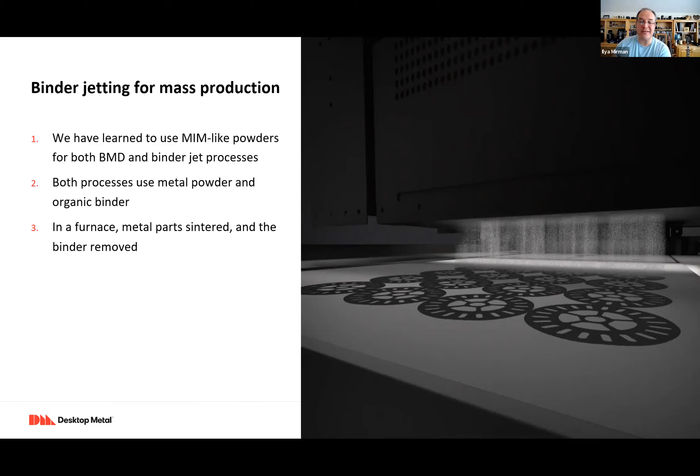It's just that what gets printed layer by layer is a binder that selectively defines where the metal powder particles will become solid and where they won't. And so both processes use a metal powder, an organic binder, and in the furnace, the metal parts are sintered with the binder totally removed. What are the wins? Why go to binder jetting on the manufacturing floor? Well, first of all, the giant win is you eliminate tooling.

You no longer need to have molds or work holding fixtures if you're CNCing parts. You can just print without the constraints and the lead times of tooling. You can reduce tool wear. If you can print with binder jetting, you can print, of course, hard to machine materials such as tool steels, but also other materials.

It's really a fixed labor cost. It's like you load the dishwasher. I don't know if this is going to work. You load the dishwasher, and then the dishwasher washes all the dishes for you instead of washing each dish by hand. I used to wash dishes in a restaurant. So you reduce the individual labor cost per part.

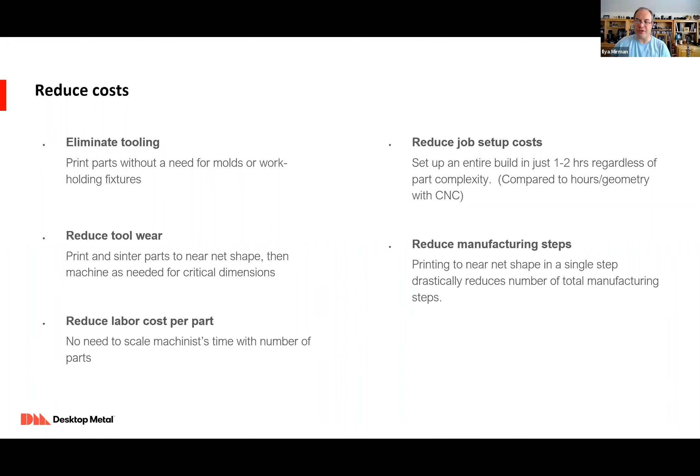There's a lot less setup cost. You can now make smaller jobs more economical, because you don't need to create tooling for a relatively small 1,000-part run. And you do reduce the manufacturing steps. There's a lot of parts that might require 20 manufacturing steps, and now you 3D print the near net shape, and now you reduce it to 4 or 5 steps. We see that all the time.

So you reduce the costs of parts you're producing. The other benefit, though, is you can increase revenue by producing parts you couldn't before. We've seen a lot of examples where companies are machining 3 components, welding them together. Instead, you can do assembly consolidation, design one part that combines all of those parts and print that relatively complex part.

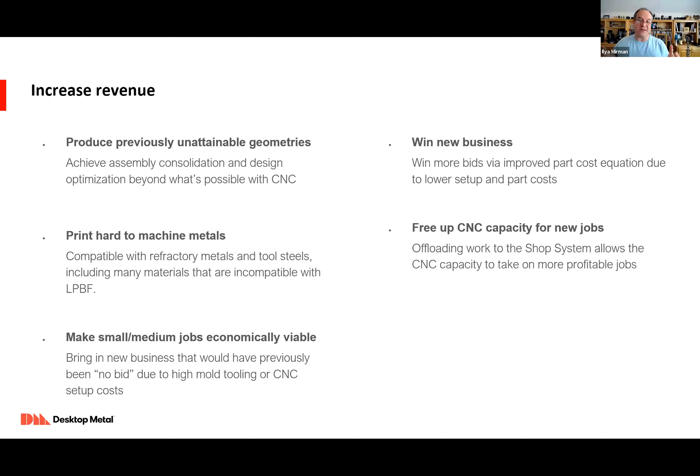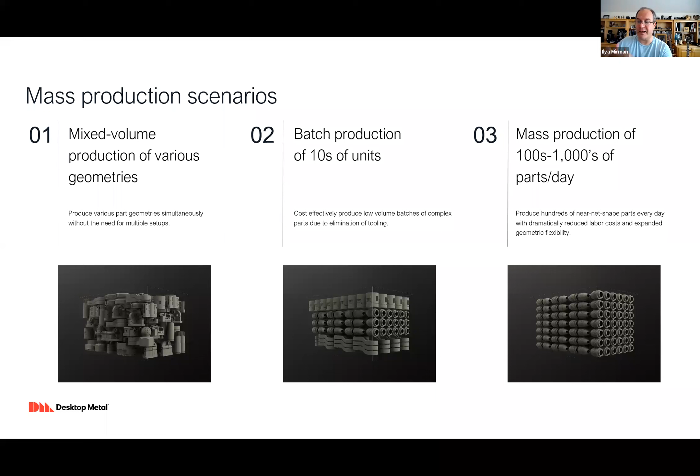So the mass production scenarios range from mixed volume production of various geometries, so every part could be different, all the way up to mass production where you're making hundreds or thousands or many thousands of parts per day. Here's just a few examples from the field of the kind of parts.

I'm going to hold some of them up so you can kind of see the precision, the size. You can make relatively small parts. Here's a couple gears from a transmission for a power drill. And you can make larger parts. You can make impellers. You can make this.

Here's a nice, you see this gear, this wheel, pretty fine features. And of course you can do a nice customization. So this is the shift handles, custom shift handles for cars. All right. Here's real parts being produced by these binder jetting systems. I'll give you just a couple examples to give you a range, because we've talked about 3 different metal systems.

So here's a little output pulley for a car seat belt. So this is a part just about a few centimeters long. On the studio system, if you're running the studio system all year, you can make a few thousand. If you're running our mid-range shop system, the shop system with an 8-liter build box, little parts like that, you can make almost 150,000 parts per year. And with a production system, the big boy system, you make a few million.

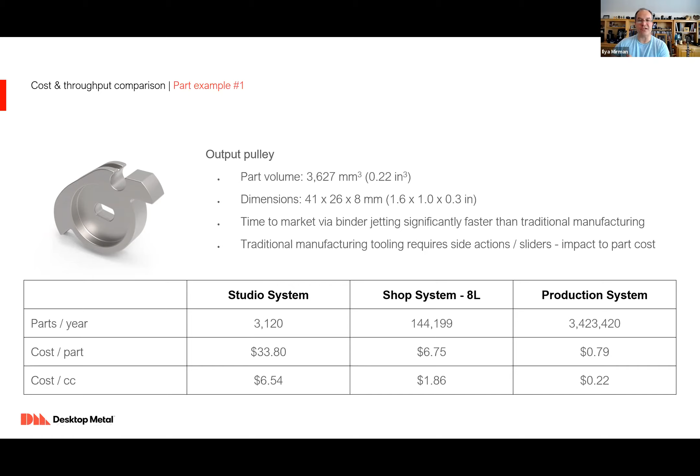So really, it depends. And you see there's the trade-offs, in terms of what does the system cost and throughput, materials, and the cost per cubic centimeter. The costs go down. So on the one hand, the production system is a more expensive system. On the other hand, you can make parts orders of magnitude larger volume and dramatically reduce price.

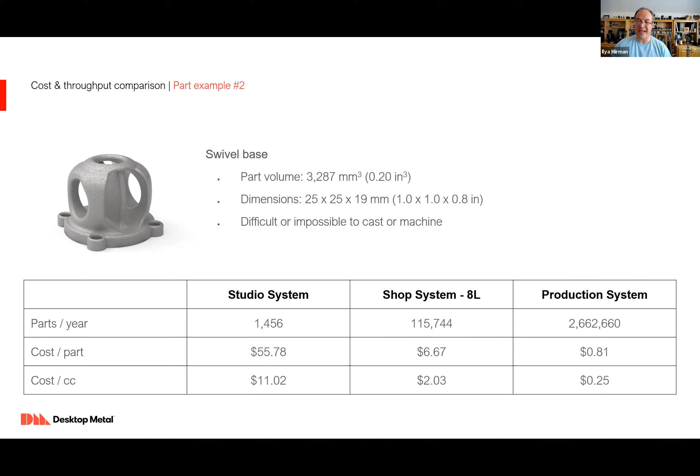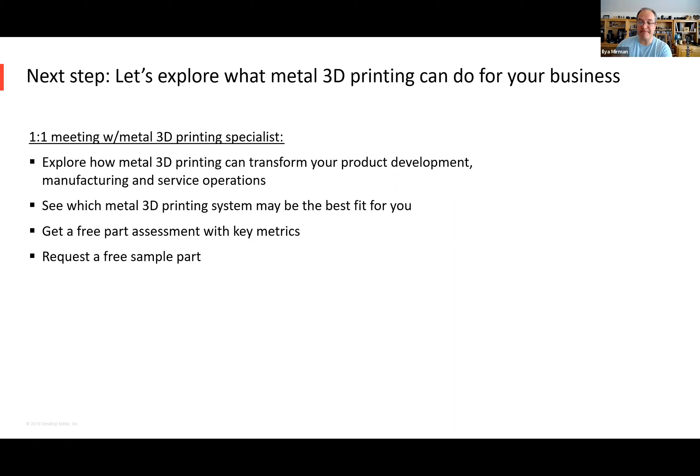It looks like there's some questions left. Let's see, are there any questions that are worth answering for the public? Nick, feel free to chime in. Talk about surface finish? Both studio, binder jet, all that kind of stuff?

Sure. So surface finish. I'll give you the number and then I'll hold something up to the screen. The surface finish is the average roughness. So you got a profilometer. We have profilometers, our customers measure the parts. The X and Y for the studio system are probably 3 to 5 micron average surface roughness, 3 to 5 Ra. So that's in the X and Y plane.

In the Z plane, you see the build lines. So for example, this part gets built this way. And so there are fine lines here, the build lines that are, I'm sorry, I keep saying probably, it's exact. We measured this 100 times. It's 10 to 15 micron Ra surface roughness.

So if you run your finger along this edge, you can actually with your nail feel the 10 micron bumps. I don't know, you might be able to see that. So the short answer is on the Studio, you get 3 to 5 micron surface finish. So for example, here's some sheet metal parts. The top here, the X and Y axis, you'll have 3 to 5 microns, and probably 10 to 15 micron RA in Z.

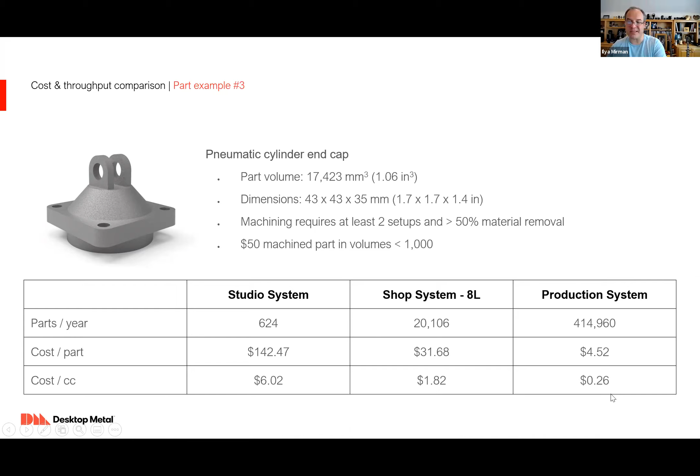But you see, per cubic centimeter, you have something like several dollars per cubic centimeter with the Studio system, a couple dollars or a little bit better than that with a Shop system, and then tens of cents, 20, 30, could be 40 cents per cubic centimeter with a Production system. So that varies pretty widely. It depends on a number of factors, like what's the geometry, how hollow is the part, that kind of thing. Okay, back to this.